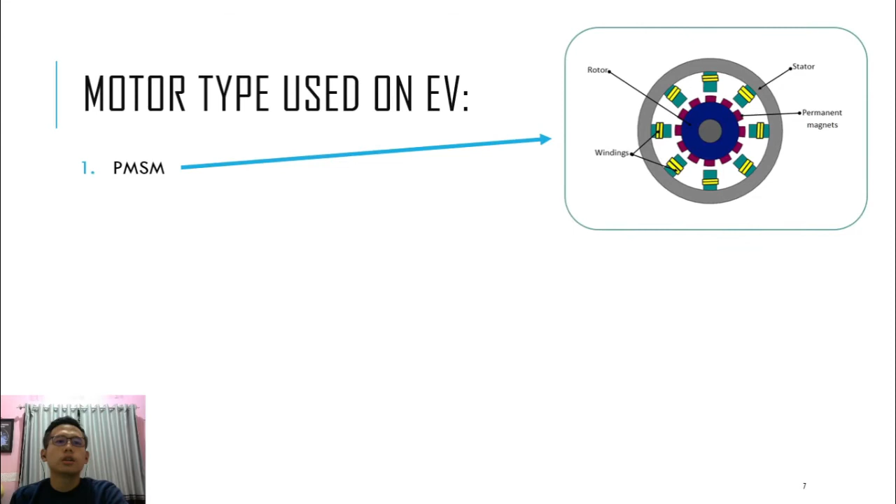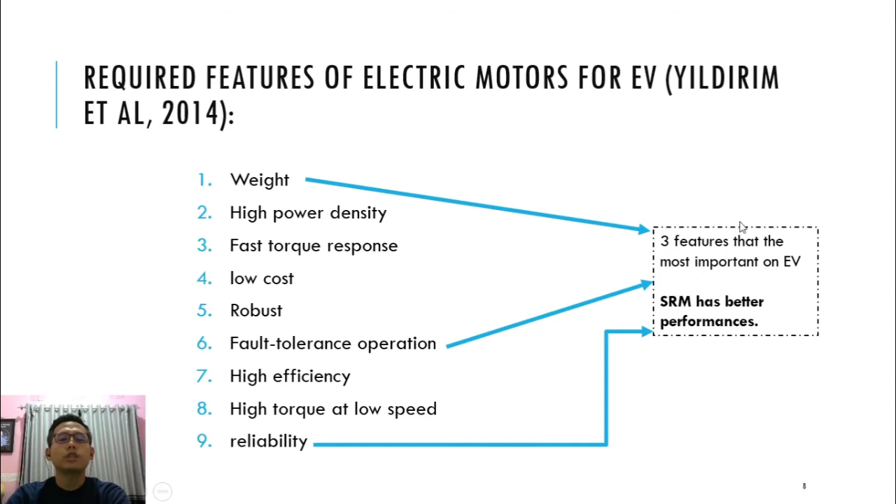In previous research, there are 9 required features of electric motors for electric vehicles. These are the features, and the 3 most important features for electric vehicles are weight, fault tolerance operation, and reliability. Based on those 3 features, SRM has better performance compared to PMSM and induction motor.

This is the SRM specification. The control input to the SRM driver is between 0.8 to 5 volts. When we test, the SRM rotates at an input between 72 to 84 PWM values. So the control output value must be between 72 to 84 PWM. And the resulting control signal is only a positive control signal.

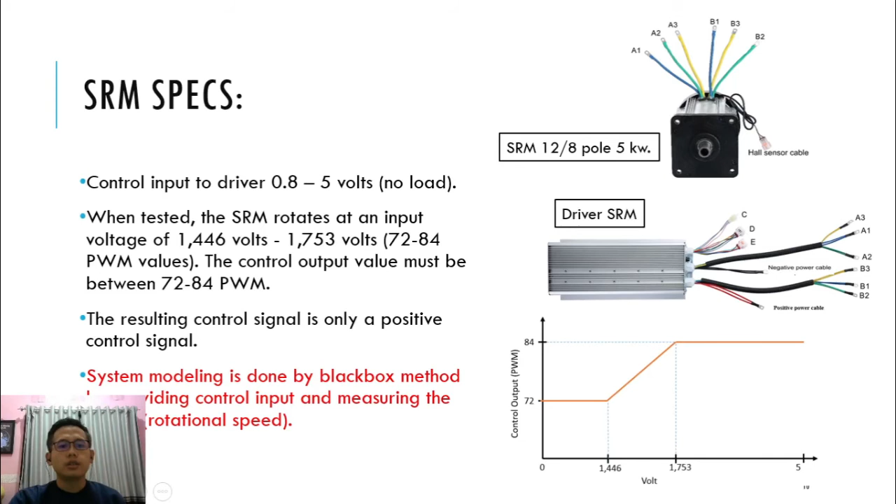The system modeling is done by the black box method because we don't know the parameters of the SRM. We don't know the value of resistance or the value of inductance. The modeling is done by providing control input and measuring the output. The output is the rotational speed. This is the picture of the SRM, this is the driver of the SRM, and this is, let me zoom, the input saturation that we must follow when we control the SRM.

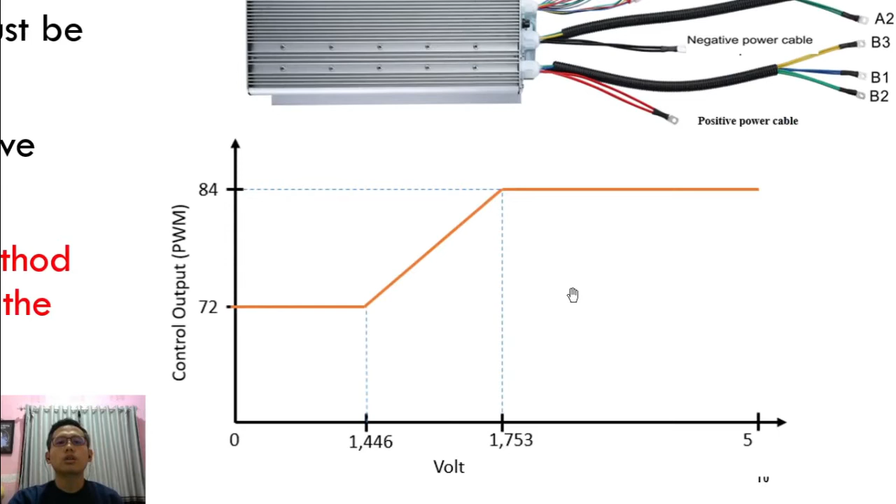Why do we choose PI and PI anti-windup control strategy to control the speed of the SRM? Why PI controller? SRM is a highly nonlinear system. Nonlinear control strategies such as sliding mode control, fuzzy controller, or adaptive control are used to achieve high dynamic performance of SRM. Those control strategies need an accurate model of the SRM, but accurate SRM models are difficult to build.

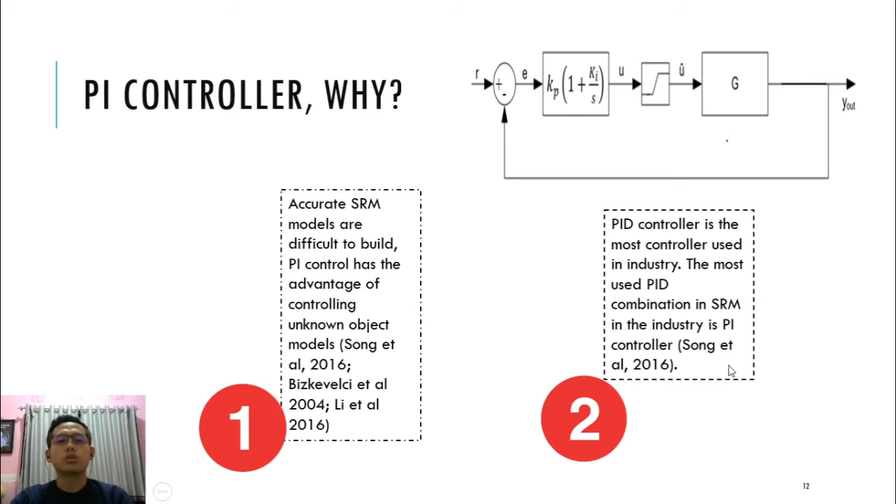The PI controller has the advantage of controlling unknown object models. And the second reason is the PID controller is the most used controller in industry. The most used PID combination is the PI controller. So that is why we choose the PI controller. Anti-windup because in the PI controller there is saturation. It is possible that the control signal that appears exceeds this range. So the PI anti-windup is chosen to overcome that possibility.

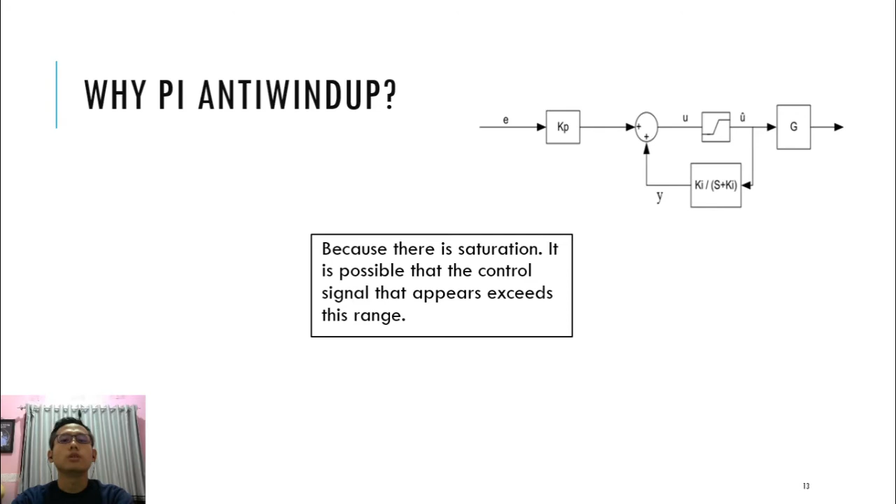The behavior of a nonlinear system around the operating points can be approximated by assuming that the system is linear, but it shouldn't move too far from its operating point. We test the SRM in an open loop, then we measure the response. The response is rotational speed.

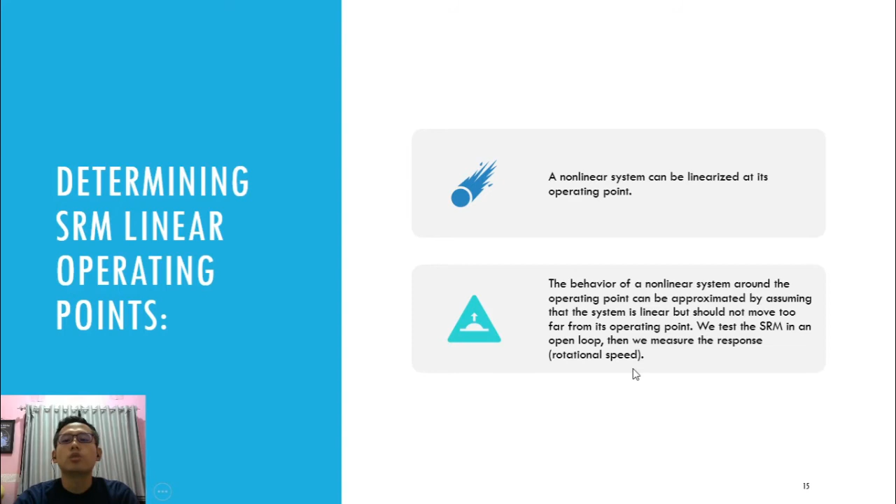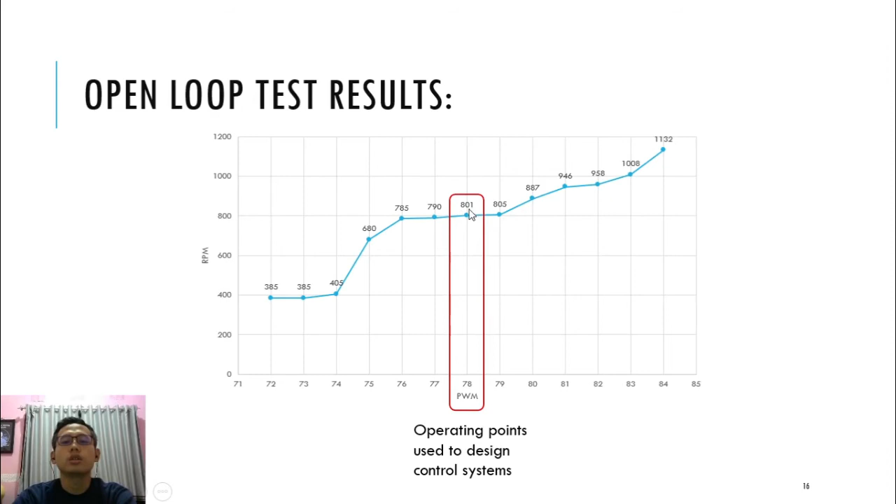This is the open loop test results. The x-axis is PWM and the y-axis is RPM. And these are the operating points that we use to design the control system. The purpose of this research is to design the SRM speed control with saturation and nonlinearity constraints in SRM by a linear approach. Now let's go to the controller design section.

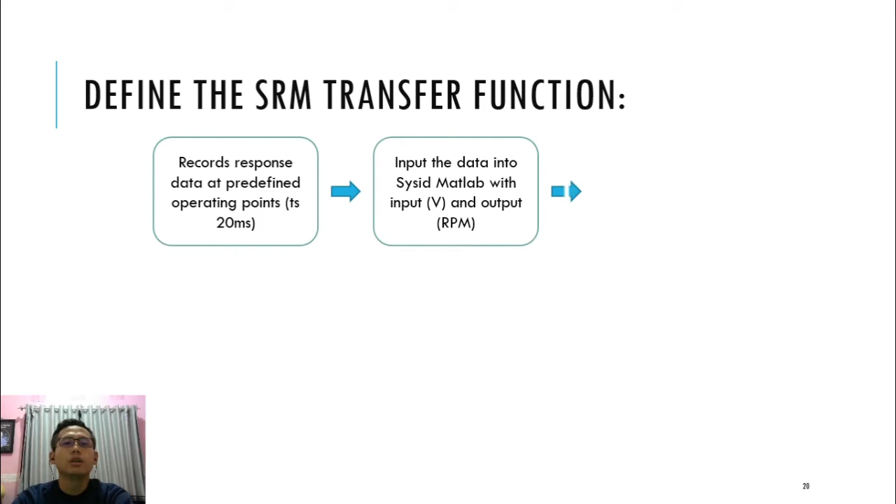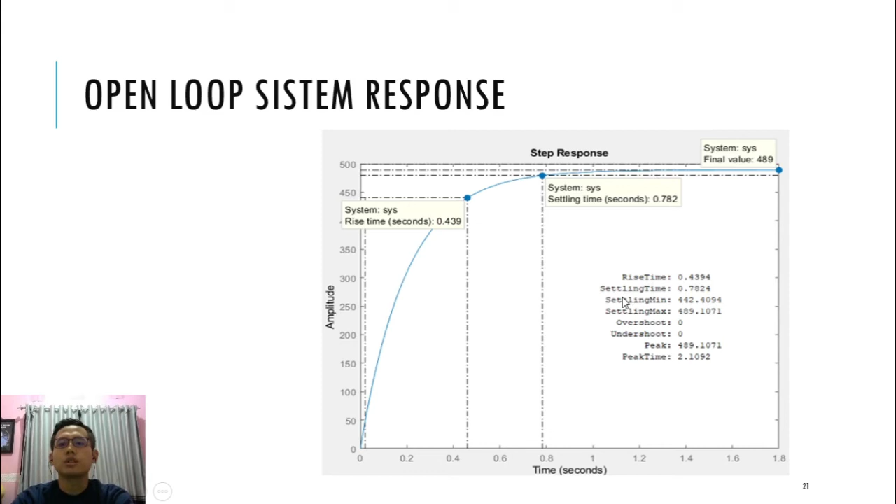This is the SRM open loop transfer function. This is the open loop system response of the SRM model: the rise time, the settling time, the overshoot, the undershoot, and the peak time. To determine the Kp and Ki values, it is done analytically with the 2% criteria, the desired settling time is 0.1 second, the steady state error is 0%, and the overshoot is plus minus 2%.

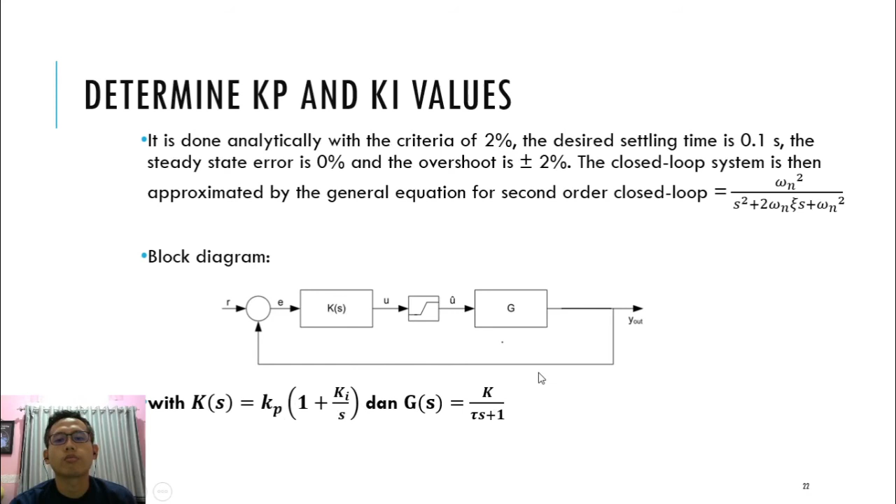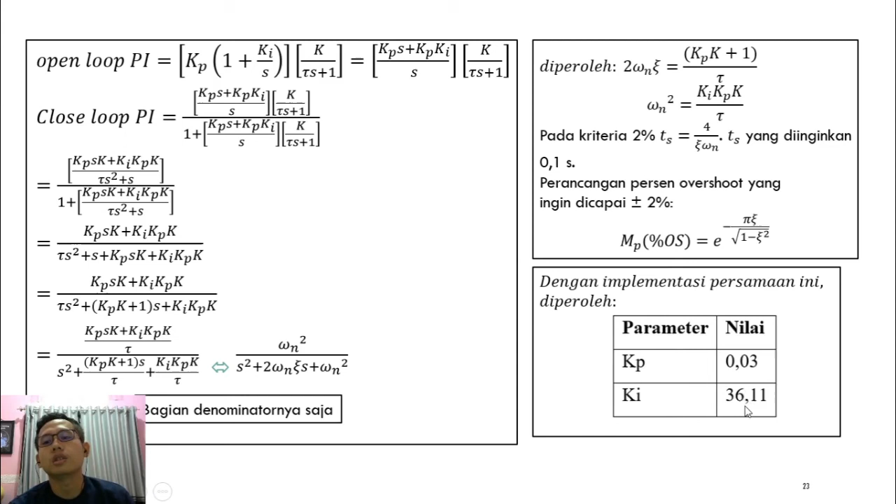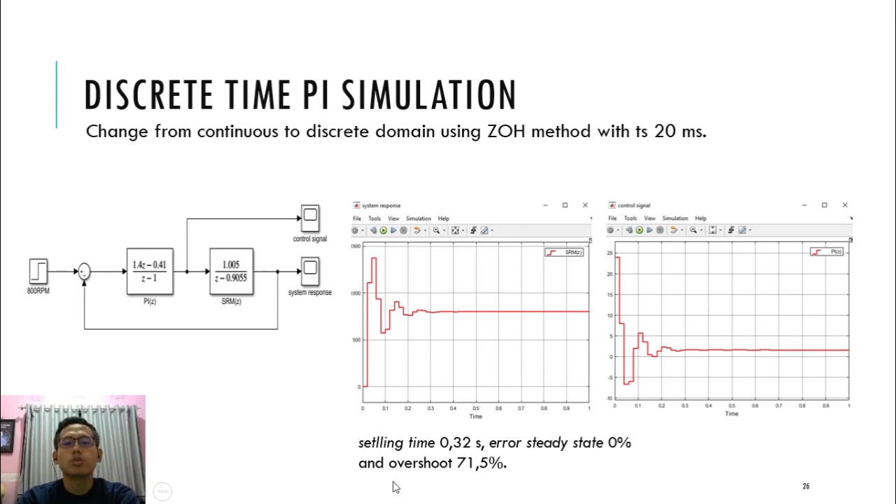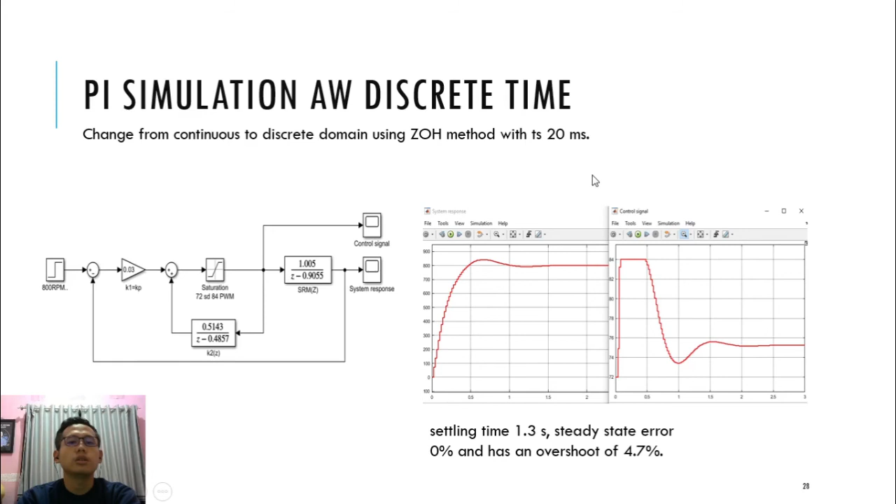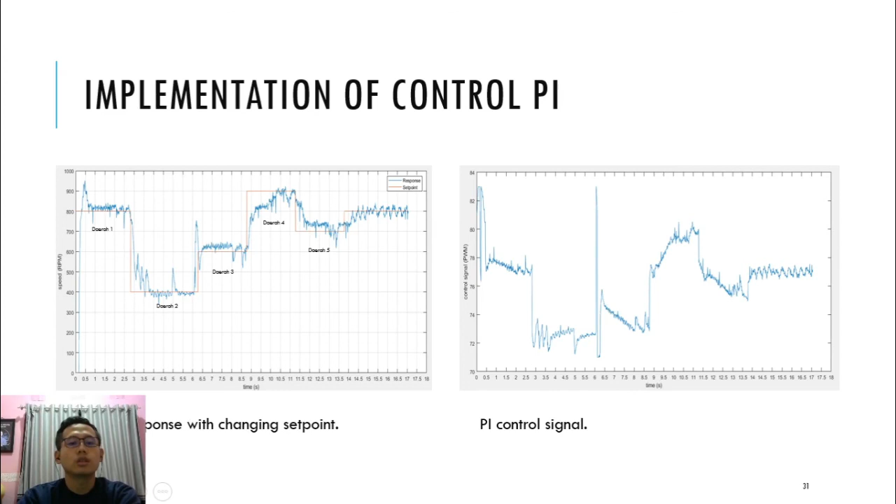And now let's go to the results and discussion. This is the implementation of the PI controller. This is the SRM response, and this is the control signal. Now the implementation of the PI anti-windup controller. The system response is like this picture. Let me zoom. The system response is better than the PI controller. The PI anti-windup is better, as we can see. And this is the control signal.

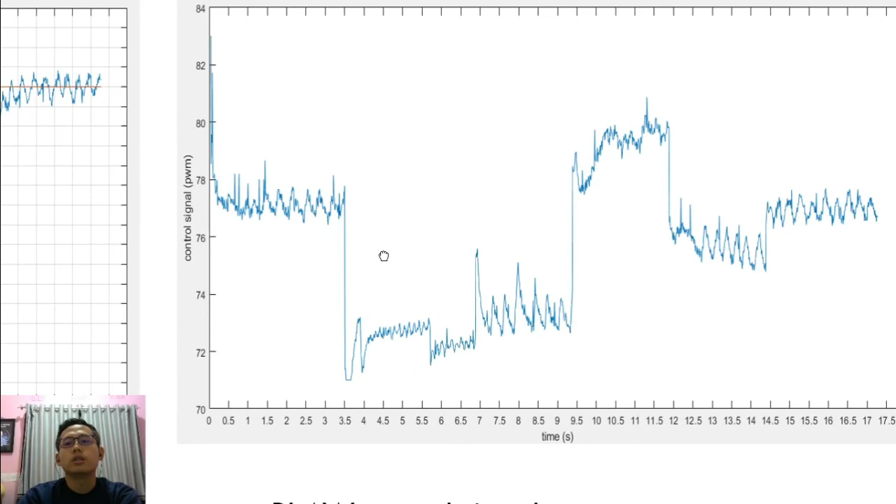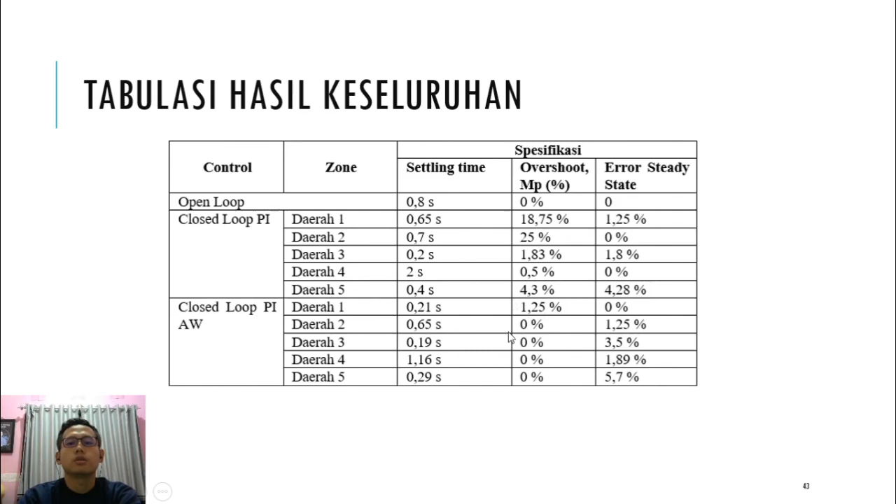And now it's the data tabulation of the system response compared to the open loop response of the SRM. The last part of this presentation is the conclusion. This research has succeeded in implementing an SRM speed control system with PI and PI anti-windup controllers. The relationship between PWM and SRM speed is non-linear. In this study, a linear approach was used. The approach is carried out around the SRM operating point, which is 800 RPM.

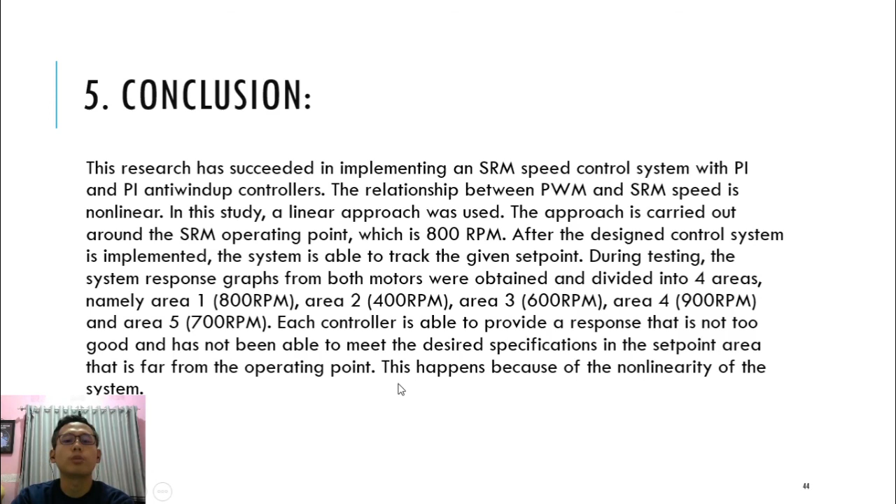After the designed control system is implemented, the system is able to track the given set point. During testing, the system response graphs from both motors were obtained and divided into areas or zones, namely area 1, area 2, area 3, area 4, and area 5. Each controller provides a response that is not too good and has not been able to meet the desired specification in the set point areas far from the operating point. This happens because of the nonlinearity of the system.